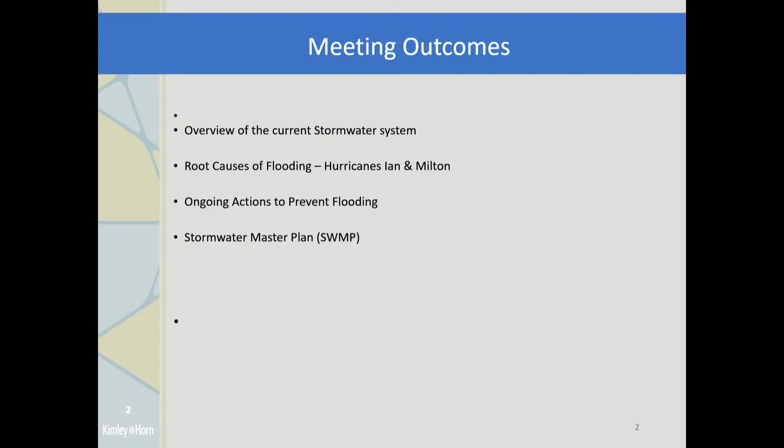So these are just our meeting outcomes, and City Manager Wayne has already been through these, so I'll just skip to the next slide. So, as the Manager indicated, we're going to start off tonight with a general overview of our stormwater system, starting with the larger, going to the smaller, and where eventually that water goes. Won't spend a lot of time on it.

But Juno, I just want, I'm sorry. Sure. For one quick pause for council. If you say something and immediately in one of our minds we want clarity, are you okay with us pausing you and having you retouch on something? Yeah, I think I would prefer it that way, so that it's fresh in everybody's mind. If I use a term or say something that you guys don't understand, please by all means stop me, and I'm happy to provide additional explanation. Okay, so we'll do that, and when you get to the projects portion, after each project, give me a second to see if anybody has specific questions to that project. Absolutely. Happy to.

So next, we're going to talk about some of the major drainage features in the city stormwater system, starting off with our stormwater ponds. As you can see, we have almost 600 ponds here in the city of Port Orange. Of that 600, the city maintains 136, so less than 25% of the ponds in the city it's actually responsible for maintaining. The majority, over 75% of the ponds, are maintained by private entities. Most of those are homeowners associations or a property owners association for a big commercial project. So we rely a lot on those associations to properly maintain their systems. DOT also has a handful of ponds, and so does the county.

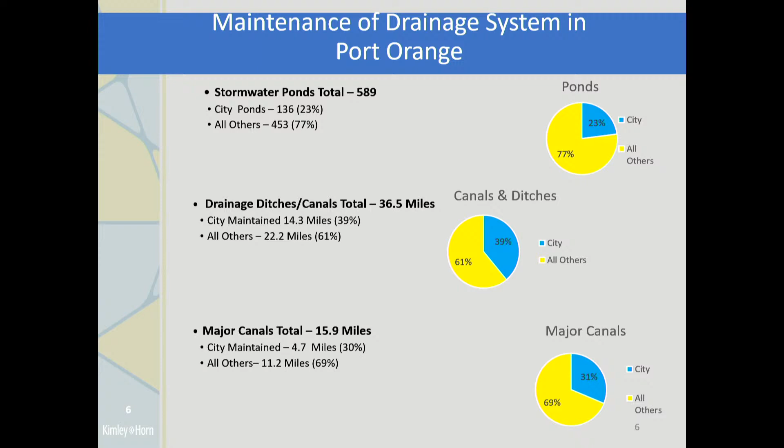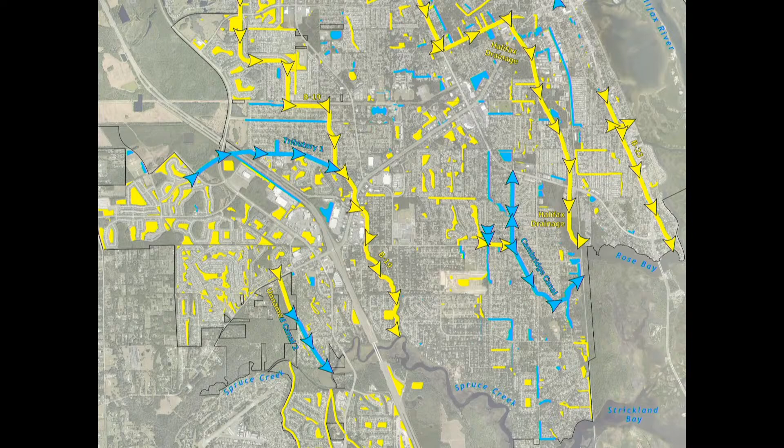And then we'll take a look at this map and see if I can get this to work here. Zoomed in nice. So as you can see on the map, everything in yellow is maintained by an entity other than the city, and everything in blue is maintained by the city. The larger bold lines with the arrows are our major drainage canals, the smaller ones are the ditches, and then the ponds are the other entities you see. So if you look at the canals and ditches overall, again, we maintain about 40% of those here in the city.

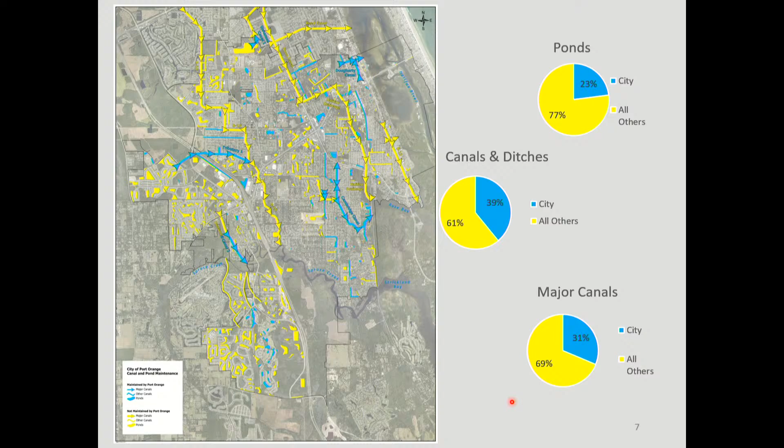Okay, so where does all the water go? So the water gets from the ponds into the ditches, into the canals, into these major canals. And then when the water flows out of the city, we call that an outfall. So that's basically where water is going from a ditch or a canal out into a receiving water. So here in the city, we have 3 receiving waters. We have the Halifax River, we have Rose Bay, and we have Spruce Creek, which then flows into Strickland Bay. So 3 receiving waters for all of our outfalls.

We have 2 types of outfalls in the city. We have gravity outfalls, where that's just what it is. It just takes the slope of the land and flows out via gravity. We also have pumped outfalls. So on the map, the gravity outfalls are indicated by a blue arrow. The pump station outfalls are indicated by a purple arrow. I'll zoom in a little bit on the map so we can see.

Even though there are approximately the same number of purple arrows or pumped outfalls as there are gravity outfalls, as the manager indicated, the vast majority of our water discharges via gravity systems. So we have one major pumping system, and that's our Cambridge system. The rest of our pumping systems are relatively small when compared to the major gravity outfalls we have.

Are all of the major outfalls one-way flow? No. Can you explain that? So these gravity outfalls discharge into tidally influenced waters. So the Halifax River, Rose Bay, Strickland Bay, up Spruce Creek, it is influenced by the tide. So if you have a high tide condition like a king tide or a tidal surge associated with a storm, it can actually physically push that water back up into those canals and basically, like you said, reverse the flow. So they are not strictly one-way systems.

Just one more thing on this map, and I don't have my pointer, so I'm going to have to exit out of the Zoom here. But if you look at these two right here, you'll notice that we have a blue arrow facing a purple arrow. That's going to come into play later on in the presentation, where our biggest gravity outfall in the Nova Canal system meets at the same place as our largest pump station outfall in the Cambridge Canal pump station. They meet at the same place. So when we start going over the projects later, we try to address that situation.

Juno, can I ask you a question? Please. So back to king high tides, storm surge, water's coming over Halifax, it's pushing all the way to US 1. Right? We've been very fortunate we haven't had a direct hit from the Atlantic. Most of our storms come from the southwest. We have high tides due to high winds. We have king high tides due to lunar. When it rains 22 inches, on the other side of US 1, what do we do with that water? I mean, we got a storm surge, and we got 22 inches of rain.

So that's an excellent question, and not to get you too far in advance, but that's when you have to turn to what we call mechanical means, aka pumping. We have to pump that water, so you can overcome those tides if you pump water. Currently, we don't have those mechanisms. We have a couple of smaller pump stations along that corridor, but as you'll see as I go through some of the projects, that's a lot of times the solution we landed on. Thank you.

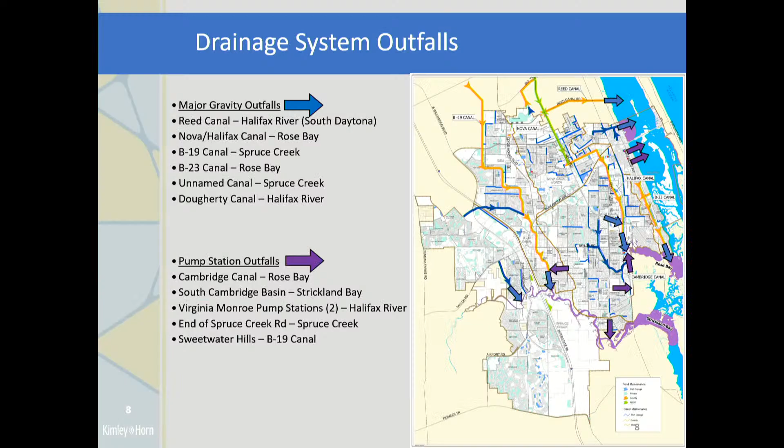That's good. Yep, that was that one. So that was just kind of the brief history of big picture basins into canals, ponds, canals, and ditches, into outfalls, and how all the system ties together. Next, we're going to look at some of the causes of flooding in Port Orange, and we're going to really focus on Hurricane Ian and Hurricane Milton, because those are our two most severe flooding storms that we've had.

And why is 1990 important? Well, going through the mid 80s into the late 80s, the federal government and the state government were developing stormwater regulations and how to manage stormwater. And then in November of 1990, the city formally adopted our specific stormwater design criteria that we're still using. A lot of that criteria today, obviously, we've developed and advanced. But starting in November of 1990, we had those specific design criteria for stormwater regulations. So over half of the homes in the city were constructed prior to stormwater regulations. That's an important thing to note.

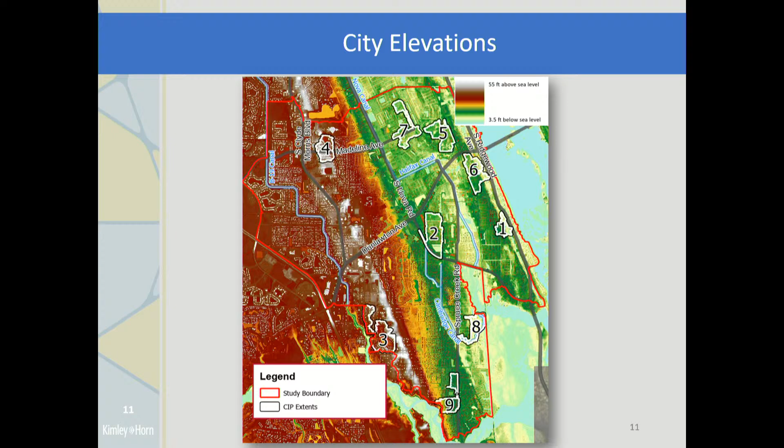Okay, so now we're going to start talking about FEMA special flood hazard areas. A little bit of history. The FEMA flood maps, or as we know them, flood insurance rate maps, were developed in the 60s, prompted by the National Flood Insurance Program, and they were meant to encourage homeownership and to protect properties against flooding. So these are federal maps, developed by the federal government in association with the National Flood Insurance Program.

So you can develop in these special flood hazard areas with base flood elevations today, but your finished floor elevation has to be a minimum of 1 foot above that base flood elevation. So if your base flood elevation is at 5, the minimum your floor can be is at elevation 6. And that's been determined by FEMA's mandate, and I believe that's city code, right, Tim? That's the city code. Okay.

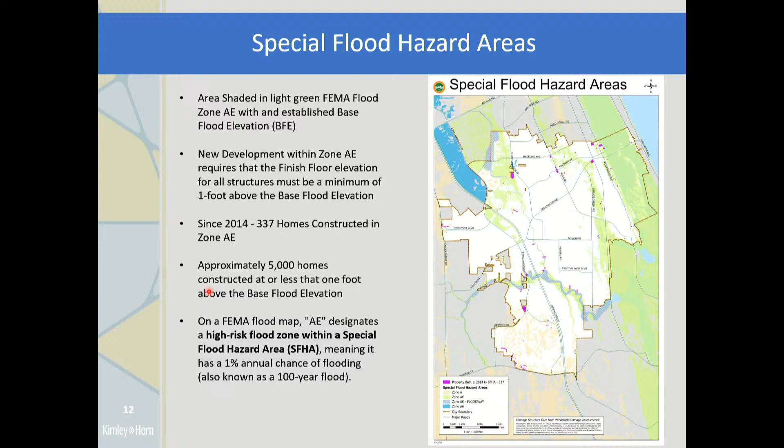But the thing they both had in common is when the eye exited the state, it was just south of Port Orange. That puts us in the northeast quadrant, the dirty side of the storm, known for higher rain totals and more severe weather. So we caught a lot of bad luck from how those storms tracked across the state. They went really, really slow and dumped a lot of rain on us.

This really just kind of follows up with the previous slide. After Hurricane Ian and Hurricane Milton, myself and public works staff and management staff have visited dozens and dozens of residents. We've talked to dozens of residents on the phone, at their houses, and for some of the longer term residents, the residents that have lived here for a long time, we started to hear a common theme. I've lived here 20 years. I've lived here 30 years. I've lived here 40 years. I've never flooded. How is that possible? So, well, let's try to figure that out.

Okay, so that's kind of the first part where we've looked at the stormwater systems, how they function, where they go, and looked at some of the root causes of the flooding from Hurricane Ian and Hurricane Milton. Now we're going to start talking about some of the ongoing actions, some of the planning actions that we've been taking, and some of the maintenance and repair actions that we do as a city.

So the first thing is the Stormwater Master Plan. That's what we're here talking about tonight. As the manager indicated, we're about 95% complete with the master plan. I have a draft of the plan that I'm currently reviewing. And so really what we're doing right now is we've developed a matrix to try to prioritize these projects. So we're really finalizing that prioritization matrix to prioritize the projects.

And probably the most important thing is trying to figure out how we're going to pay for all these projects, because none of these projects are cheap, unfortunately. Or not cheap, but cost effective. Cost effective. Thank you, Councilman Green, I appreciate that.

And so at the same time, as we're doing the master plan, we're doing what we call a vulnerability assessment. A couple of years ago, the state came up with this Resilient Florida program, a program that makes you eligible for grant money to build projects. Before you can be eligible to apply for grant money to build projects, you have to perform a vulnerability assessment on your city. We received a grant from FDEP to perform this assessment. We're about 70% done with that assessment.

So once we complete the vulnerability assessment, we package that up and we send that to FDEP. They review it, and once they accept the vulnerability assessment, then we're eligible to apply for what they call implementation grants or construction money, up to 50% of the construction cost. So if we're looking at a $20 million project, we're potentially eligible for $10 million through Resilient Florida by doing this vulnerability assessment and having it accepted by the state.

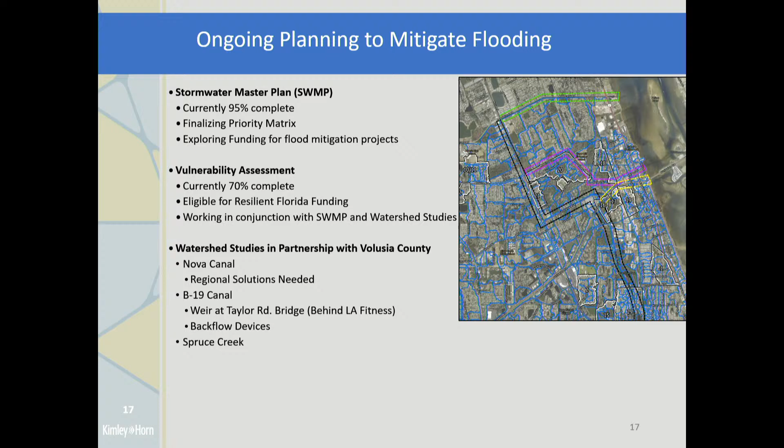Seeing a theme. Yeah. We are. Okay, now I know why they have port in the name.

All right. So, this is not my area of expertise by any stretch of the imagination. This is something that primarily our community development department is working on, but it's just another thing that the city's working on. There's multiple programs out there to help individual homeowners. FEMA being the first one. With FEMA, the unique thing is the FEMA grants, first of all, take a long time to process.

We're still waiting for responses back from Hurricane Ian through the FEMA process. And the city has to be the applicant on those grants. So the state did a really good thing early in 2024. They developed a program called, if I get it correctly, Elevate Florida, and the Florida Division of Emergency Management runs that program. The idea is it's going to be a very similar program to what FEMA's doing, but they want to take those timeframes and cut them in half or even more. They want these grant processes to move very quickly.

And with these grants, the individual homeowners apply. Correct, Tim? Okay, thank you. The other thing available for individual homeowners is going back to the Transform 386 through the county. There is some individual assistance available through the county, and I think they actually held a couple of workshops today for individual assistance. So aside from the big regional stormwater projects that we're going to construct that will help a lot of people, there's a lot of one-offs where maybe it doesn't make sense to do a $5 million project for 3 homes. That's where these other programs become really important, because there's still something available for those homeowners.

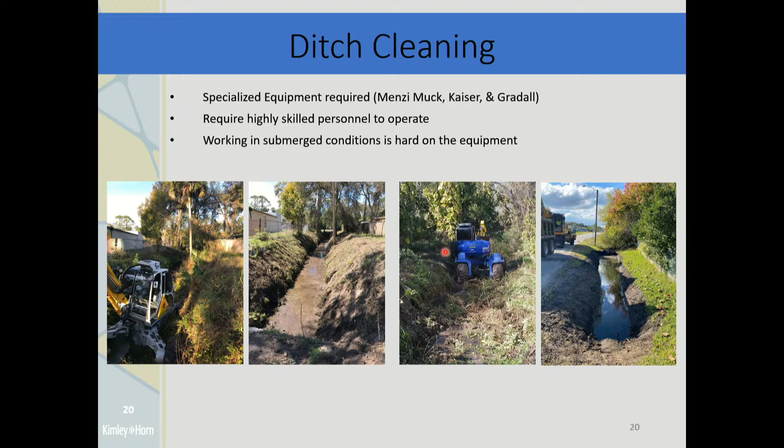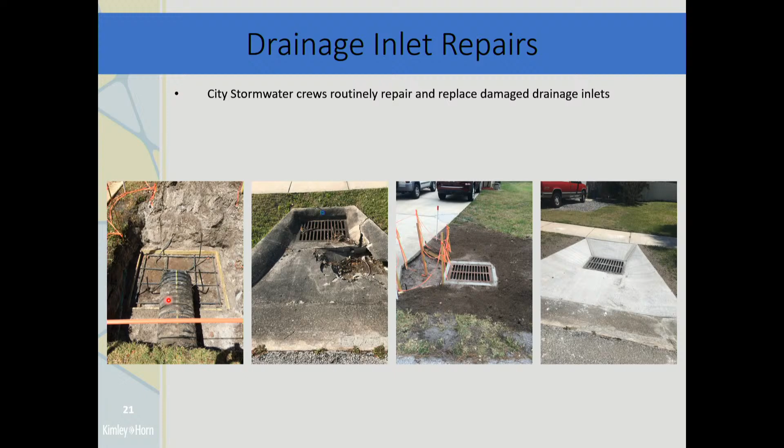Just real quick, so we have over 5,000 drainage inlets in the city. So this is a constant thing we're doing. We're repairing. This is what we call the apron to the inlet. So these things are getting broken all the time. So we're always out there repairing these, and sometimes we're even going out and replacing inlets altogether if they've been damaged or broken. So this is an ongoing activity for us.

Corrugated metal pipe. So going back to the 70s and 80s when we were developing half of the city, it was common practice in those days to use what they call corrugated metal pipe, or CMP, for the roadway drainage infrastructure, for the pipes underneath the roads that capture the roadway drainage and route it to a pond or to a canal. And due to our high groundwater, in the older parts of the city maybe a foot or two below the surface sometimes, these metal pipes sitting in that water for decades corrode and they rot away.

And you see a really good example of that right there. You see that piece of pipe, that was underneath the road. And so when those pipes fail, not only do you have to fix the pipe, you've got to dig up the road, you've got to fix the road, and those are very expensive fixes. So what we're trying to do to be proactive is another method. It's a trenchless method, and it's called cured in place pipe lining.

So you basically have a liner that's impregnated with an epoxy type resin, and they run that liner all the way through the piece of pipe that needs to be rehabbed, and you seal off one end and inject either hot steam or hot water into that liner, and it blows that liner up to match the diameter of the pipe, and then the heat sets that resin off. And as that resin cures, you end up with a brand new piece of pipe inside your old piece of pipe. You're not digging up roads most of the time, you're not having to do major repairs.

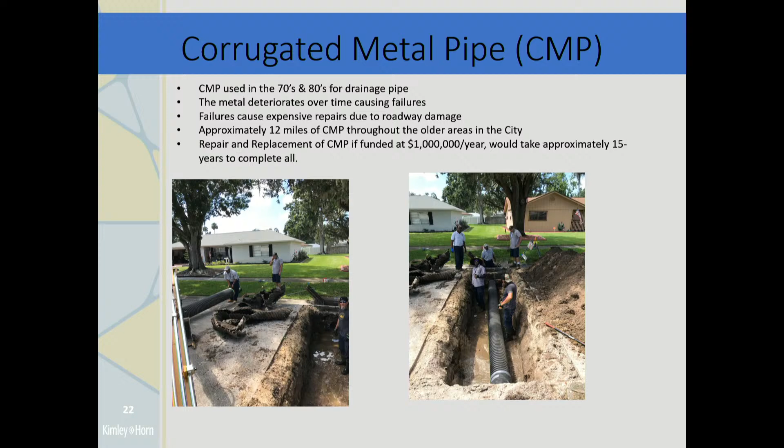So we're being very proactive with trying to get out into the older areas and find these pipes before they fail and line them. And just as a point of reference, we have about 12 miles of CMP remaining in the city. And if we fund it at $1 million a year, it's still going to take us almost 15 years to get all that pipe either replaced or lined. So we will be doing this for quite some time. Okay.

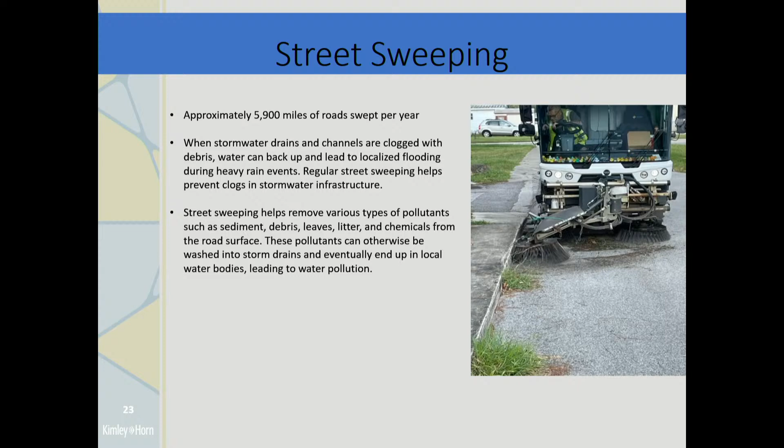The next thing is street sweeping. I like to call this our first line of defense for our drainage system. So we're sweeping the roads, basically trying to get as much debris, leaves, branches, oils, and grime off the road before they get down into our drainage system.

So what you do is you get that hose, which is a jet hose, and there's a jet nozzle that goes on the front of that hose, and it's got backwards facing jets, kind of like a jet engine, facing backward to push you forward. So you put that jet nozzle in your piece of pipe, you turn the jet on a little bit, and it pulls itself through the pipe.

And those hose reels are usually 300 to 500 feet long, so you get a couple of 100 feet out of there, and then you really crank the pressure up. You get it up to 3,000, 4,000, 5,000 psi in some of these jet hoses. And you turn your vacuum cleaner on, and then the hose reel slowly reels itself back in, meanwhile pushing all that dirt, grime, and debris back to that vacuum, and we're sucking it up into that vacuum truck.

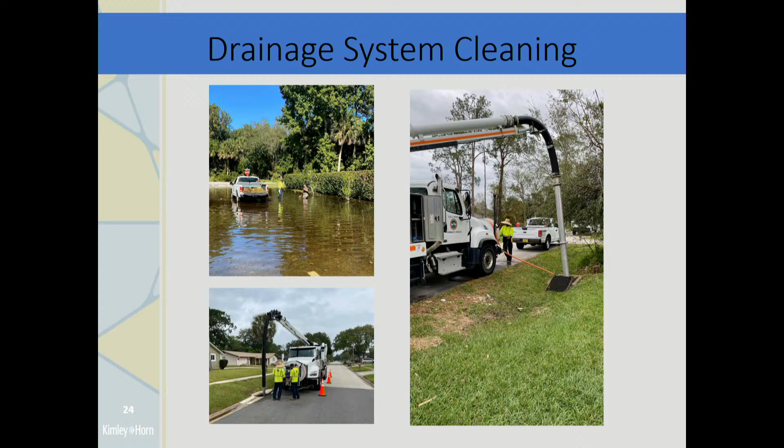The next one is just simply clearing curb lines and manually clearing a lot of work. And I'm just going to take a quick second here in the presentation to recognize our public works staff that are out there doing this work. These are true first responders, in my opinion. During the hurricane, I worked the EOC.

A lot of times we'll get a call from police and fire saying we got a call on this road, but there's a tree down. So what do we do? We call public works. Hey Tom, can you get your staff out there? Fire needs to get to this house, or police need to respond to this emergency. So they're clearing trees. There's a tree falling on a house. We can't get into the house to try to rescue this person. So these guys are there cutting the limbs, they're cutting the tree down.

So I just wanted to take a quick minute to point out that these guys were out here working during the storm, in peril, and then once the storm has passed and the floodwaters recede, they're still not done. A lot of our other first responders, our police officers and our firefighters, go back to somewhat normal operations. That's when these guys are driving trucks, pulling debris off and collecting the debris from the roads.

So after Hurricane Milton, they worked through the storm, and then immediately following the storm, they're working 12-hour days, 7 days a week, collecting debris for almost 3 months. So just a quick shout out to those guys. If you see them out there, just tell them thank you and that you appreciate them. This happens to be Andrew right here. He's a really good guy.

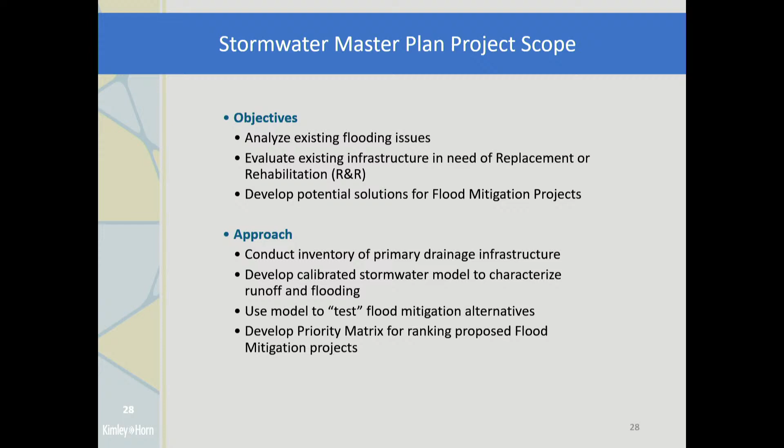And so the master plan is a document that's got a lot of information, but the heartbeat, the heart and soul of that master plan is what we call a stormwater model. And a stormwater model is basically a computer simulation. And so you use this model to try to predict something that's going to happen. I'll kind of make a quick analogy to weather. You know, you have your Doppler radars, right? And then when they show you future Doppler radar, that's a computer simulation that's predicting what the precipitation is going to be based on a bunch of input parameters.

So when we started building this model, to me there's two really, really important things when you're building a model. Your data collection and your data input are probably the most important thing you're going to do. So if you don't have good data to put into your model, it's not going to give you good output back out.

Another really, really important thing is what we call our boundary conditions, or our tailwater conditions. When we do these models, you have to have an area, and you allow water into your model, and you allow water out of your model. And where the water leaves your model, we call that a tailwater. And so when we're running these model simulations, we were very, very conservative with our tailwaters.

Meaning, we're modeling with tidal surge. We're modeling with king tides. We're not modeling at low tides when everything works beautifully. We're modeling at king tides or at tidal surge to make sure that the solutions we come up with are going to work during those conditions, because that's when we need them to work the most.

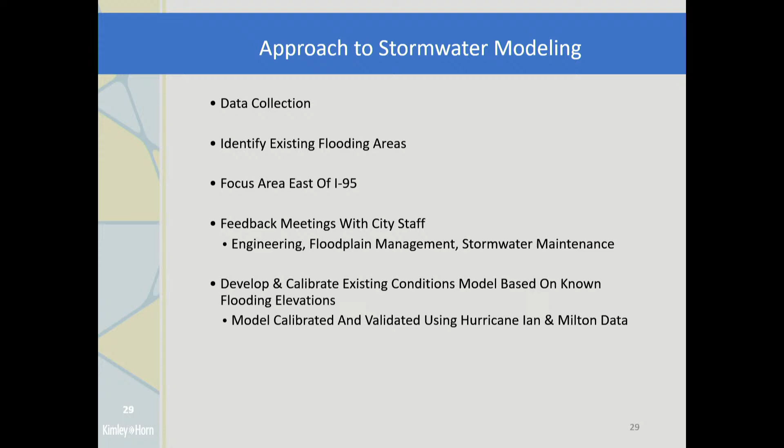So our model is predicting accurately what actually happens in the city when we put a certain amount of rainfall into that model. So that's a really, really big milestone. Once you get to that point, then you can really start to use your model as a tool. Because up until that point, you're building it, it's not a tool for you yet. It's not a tool for you until you've calibrated it.

So what you're saying is Milton, unfortunately, that came through was a calibration to what they had already put together as a model to back up what they're saying. That's an excellent point. So I think it was a day or two after Milton, I get a call from Victor, hey man, we're on the ground, we're just in town looking around. So they're here with their rubber boots on. They're looking to make sure that what their model's doing is accurately predicting what happens.

So we had a real world calibration event, basically, that you don't often get when you're developing these models. We had something that happened as we're calibrating it that we can calibrate the model to. So that really helped us have a lot of confidence in the model. It's incredibly unfortunate that it happened because we had so many homes that flooded. Yeah. But we did use that to try to make our tool even better. Okay.

And so once you've got your calibrated model, that's where you start going, okay, we know we've identified these areas. We call them areas of interest, the areas that we see in the model and that we know on the ground that actually flood. And then you start building scenarios that are going to try to fix the flooding. So you can say, okay, let's put in a stormwater pond here. Let's make the pipes bigger to the outfall. Let's do any number of things and then run a simulation and see how the model responds.

And for a lot of what we found is our gravity solutions or our simple solutions, the model didn't have what we call any sensitivity to it. So you didn't really get any benefit. So you'd run the model before you did any improvement. You'd put the improvement into the model. We didn't see much improvement.

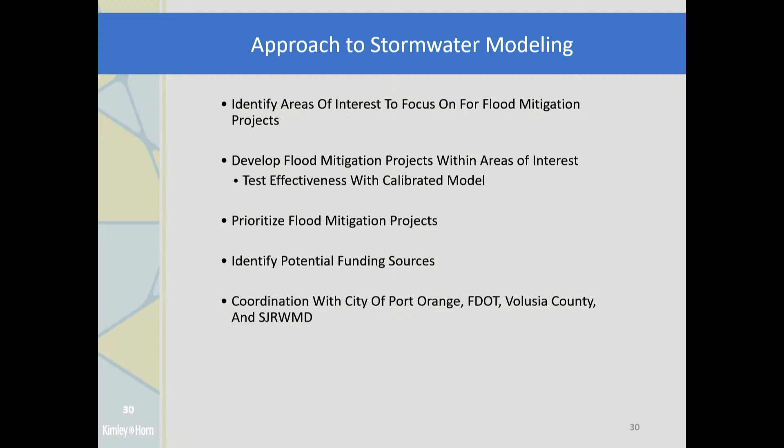And so, okay, so this slide, I want to highlight something here. See if I can figure out how to do it, because this is important. It did show up. Perfect.

Data-driven solutions. That's really important. So the solutions that we come up with are data-driven. We don't think these solutions are going to work. We have data that shows that these solutions are going to work. So kind of my catchphrase that I've come up with over the past couple of days is data-driven decisions lead to effective solutions, right? So you use good data to drive your decision, your solutions are going to work.

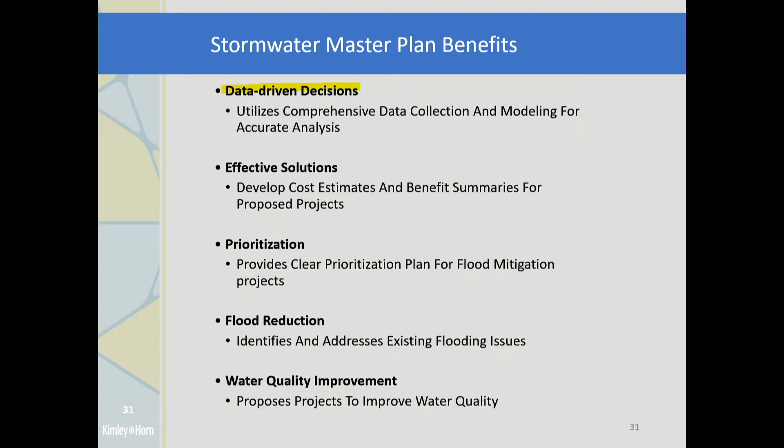The thing about these projects that we're going to talk about, these projects are not designed. They're not on the ground yet. So we're still sitting at about 10,000 feet in the air with a lot of these projects, still kind of looking at a zoomed out picture. And then once we take these projects to design, that's when we get on the ground. We do physical surveys. We know exact pipe sizes. We have a lot more real information and a lot better information. But I'm going to give you, like I said, about a 10,000 foot view of these projects. And I'm happy to answer questions on any of them.

Can I just stop you 1 second? As much as this is for us, it's for everyone in the crowd. Do y'all need a little break before we get into this? Because this is what we're here for. Thank you. Just wanted to make sure. Sensitive to you. I'm good to go. It's yours. I tried.

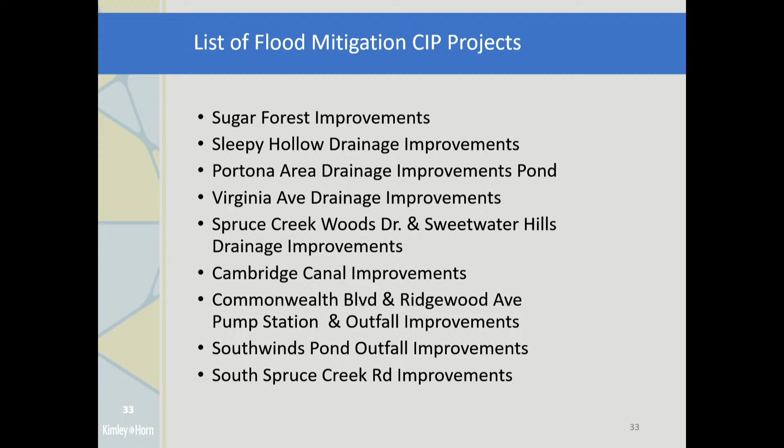And I just want to reiterate what the mayor and the manager both said, that in the coming months, even though we're going to talk about these briefly, we're going to be able to get into a lot more detail with those individual meetings, because we'll have a lot more time to talk individual projects, individual streets. So the first one, and try not to get caught up in the names. We're engineers, we're not project namers, so we just named them what we thought makes the most sense, right? So the first one we're calling our Sugar Forest drainage improvements.

So this is really a multi-phase project, and for phase one of the project, you guys have already approved the design contract, and we are going to be starting survey and kickoff meetings here in the next week or two. So this project is starting right now for design. And we estimate our design and permitting timeframe to be a little over a year, about 14 months. We're going to try to fast track these as much as we can, but some things we don't have control over. We estimate our construction time to be about 18 months, and for both phases we see a lot of potential benefit. We're talking about potentially helping 400 homes with this project, both phases.

Okay, so what does this project look like? So real quick, I'm gonna zoom in on this just so that we can kind of see. So there's some colors on here. You'll see the light blues and the dark blues. The light blues are areas that flooded before the improvement. Dark blues are areas that the model shows with the improvement.

So again, these are very conservative estimates, and we don't have finished floor elevations for all the residences. So just because a house is shaded in light blue doesn't mean that house floods. The model is not that sensitive to the finished floor elevations. The model is only as sensitive as the data we put into it, and we just put in ground LiDAR data. So the ground around a residence may flood. So I don't want people to think just because there's a light blue shade around their house, that means they're still going to flood, because that's not necessarily the case.

And then I'm going to go to the next slide because it's a little bit easier to see because there's not all the stuff on it. So while you're doing that real quick, in this map, we have inputted the topography of all of the land? Yes, so we were able to get the LiDAR data, and we use that LiDAR data as our topographic part. So there is topo in the model. That's correct. Nice, thank you. It's not survey topo, but the LiDAR data is actually incredibly accurate. They've developed this technology. It's not radar anymore. They're using light to determine the topo, and it's actually pretty accurate.

Nice, okay. Can I ask a quick question? Of course. Juno, on the first page, it says the number of properties helped is 400. Right. But then on the slide, it says buildings removed from floodplain, 183. Can you just touch on why those numbers are different? Obviously 400 homes means 400 homes stand to benefit in some way, shape, or form. But can you explain when it says 183 removed from the floodplain? So that's a phase 1 number, and the overall is the 400. Okay. So we're looking at this as a phased project, potentially a 2-phase project.

So the city about a year and a half ago purchased the 2.5 acre piece of property at the corner of Madeline Avenue and Pepper Hill, with the thought that we're going to put in a stormwater pond to help the stormwater in that area. So as we ran our model simulations, the first simulation we ran was just a pond. It didn't work. Just that pond did not solve the flooding in that area. I don't think that was a big surprise to us, but the model proved to us that it didn't work. So we're not going to just dig a pond just to dig a pond. We want to make sure that these solutions are effective.

You know the cost breakdowns for phase 1 versus phase 2? I know we got a total, but. So we're estimating phase 2 to be between $8 and $10 million. Okay. What's the estimate for one then? Yeah, phase 1, 8 to 10. Same. Oh, okay.

And again, these are not construction cost estimates. These are what we call order of magnitude estimates. We don't have any design, so we don't know the exact size of the pumps. We don't know the exact size of the force mains. We don't know the exact size of the wet wells, and all that comes into play when you're costing these things out. And also the force main is going to be the X factor in this one, the pipe that we're pumping through.

If the force main gets to a certain size, a certain diameter, we're going to have to open cut and trench the whole way, which is going to cost a lot more money because then you have to go restore all the roadway. If we get it down to a size that we can directional drill, which is trenchless, then you can start having some significant cost savings. But we're not quite there yet.

We're going to be there in a couple of months though, because we're going to start designing, and these people over here are going to help us determine that. We're going to put in a force main that's appropriately sized to handle the flow that we need it to. We just don't know exactly what that size is yet. So that's one of the X factors, one of the unknowns in this project.

One of the things, when you were talking about what we were designing it to: the west side of town, when we were showing the 1990 post, everything in Water's Edge and Woodhaven and all that area on the west side was built to that 11 inches of rain. In both storms, we had very minimal flooding out there. The issue is they're built with a ton of ponds.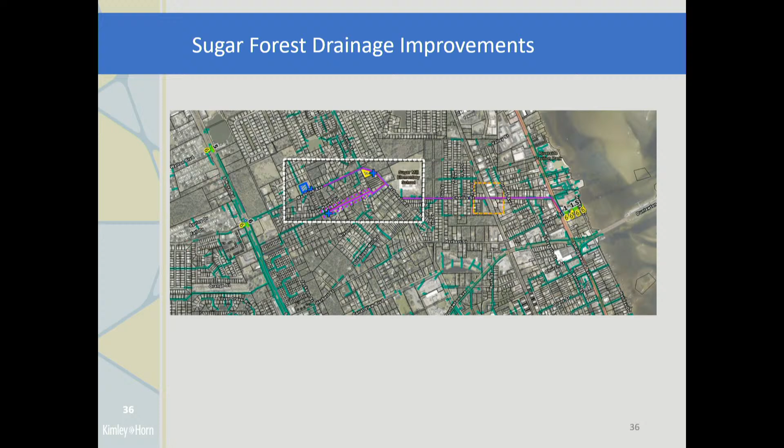Go ahead. Okay, so next we're going to talk about the Sleepy Hollow Drainage Improvements Project. This one, again, we're estimating a year and a half time frame to design and permit, and about a year and a half to construct. We're looking at 90 homes estimated, and this is again a conservative estimate for 90 homes, and then you see the cost there.

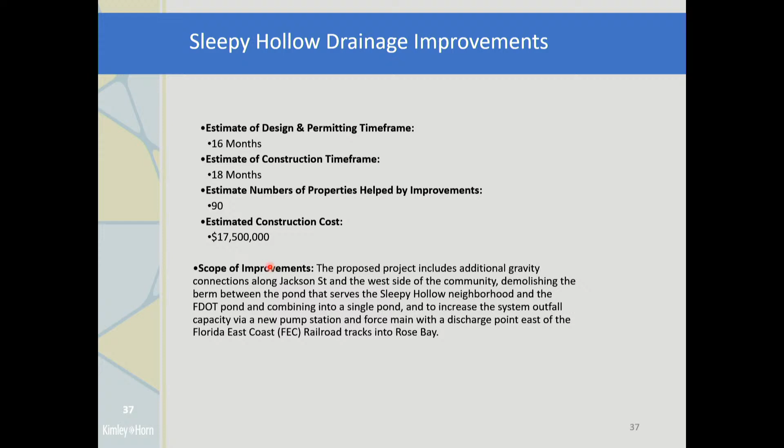So for a point of reference, I'll zoom in again on this one. So if you can kind of follow the laser pointer, I know it's kind of zoomed out, that's Jackson Street right there. Dunlawton is kind of in this top corner here, and you have Nova Road that comes through here, and then this is Sleepy Hollow right here, and then this is our Publix Plaza right here. That's where I grew up, right there.

So for this project, when I say gravity system improvements, that's putting pipe in the ground, and the idea of putting the pipe in the ground is to route that water somewhere. So we're looking at doing gravity systems along Jackson Street, and then down the west side of Sleepy Hollow, which would be the east side of the Publix Plaza, and then depending on whether we can get easements or not, we may continue down that east side or west side of Sleepy Hollow, or we may bring those gravity system improvements out onto Nova Road.

And then we're also going to put some gravity system improvements within Sleepy Hollow to try to capture that water and bring it to our ponds. So currently, Sleepy Hollow has a small kind of linear pond directly south of the development. Are you able to zoom in on that at all? I kind of am zoomed in as much as it'll let me, really. Okay. And I do apologize. These are modeling level maps, so they're not really construction ready. So you do kind of have a zoomed out view.

So there's the Sleepy Hollow pond, and then directly on the other side of that pond, there's an FDOT pond that the city actually owns, and that pond takes the drainage from North Nova Road up to Dunlawton Avenue. So this project is going to take those ponds and combine them into one larger pond. We'll get a little bit of additional volume because you have about a 20-foot wide berm. So you take all that dirt out of there, you get a little bit more volume in your pond.

And then once again, we're going to construct a stormwater pumping station on the southeast corner around the Miles Drive area, and we're going to pump. If you follow that purple line, this is where we're initially looking at pumping that water to. The city owns a small parcel of land down there. We haven't completely identified where our outfall for this project is going to be, but it's going to be east of the railroad tracks into Rose Bay.

That would also be enclosed pumping? Yes. So every time I'm talking about a stormwater pumping station, that's with a force main, and we call that a closed system. So that pipe is closed off until it discharges to its ultimate outfall. And that'd be one way at its outfall. One way at its outfall. Right.

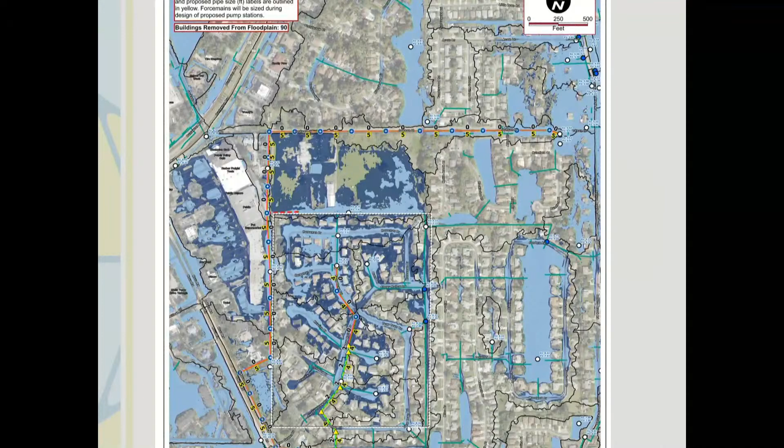And again, this one is 90 homes, but if you look at the dark blue, with the exception of the roads, most of Sleepy Hollow, we're not flooding homes. We're doing what you call nuisance flooding or roadway flooding. And we can accept that. And this is at the peak of the flood.

Were there any... I'm sorry, keep going. That's the project. Okay. In that particular area, were there any other opportunities identified where we could hold more water, even if it's temporary? I know there's a really large retention area there to the south of the project area, but any other areas that could be expanded, or didn't something happen there with those two ponds? Now they're one pond, and that's actually going to be helpful, we think?

So prior to Hurricane Milton, we were trying to pre-stage the pond in Sleepy Hollow, because these two systems, believe it or not, and I'm gonna have to zoom out to get the pointer back on it, but the Sleepy Hollow system discharges actually from this little pond down here. It goes north and then discharges through a ditch system out to the Nova Canal. And then the DOT system actually has a gravity outfall down Nova Road. So they're two separate outfalls.

So what we were doing prior to Milton, we were pumping that Sleepy Hollow pond to try to get as much storage volume available for that pond prior to the storm. What happened is we pumped that pond really, really good. We pumped the Sleepy Hollow pond so low that we had such a high difference. So the water level in the DOT pond is here, the water level in the Sleepy Hollow pond is here, and then we had a berm failure.

So the water started slowly migrating through that berm, and eventually, a term we like to use is water always wins, and that water ate through that berm, and so now the two ponds are in essence one pond. So for this project, we're just gonna finish that process. And this one will require DOT cooperation and approval for us to do this project.

So then no other opportunities in that area for any additional retention that could benefit, right? So we did look at, there is some vacant land that we looked at, but because of its low-lying nature, we didn't get a lot of storage out of that land. Okay. So currently Sleepy Hollow drains to the Nova Canal, which is already, as we know, the problem. Correct. And that's part of the issue: in low tides or when the canal's down, the system works really well. Oh, yeah, that's great.

So when we model this repair, I think we need to include what all is going into that ditch and into the surrounding area of Sleepy Hollow. Have we done that? Yes, that's included. I'll zoom in on Dunlawton Square. If you'll notice, a lot of their parking lot turns dark blue, and dark blue in these pictures is good. So a lot of that parking lot that was flooded initially turns dark blue.

So we're taking a lot of that water from that plaza, putting it into our system, and pumping it out. Currently it's trying to gravity into the Nova Canal, which is already dead. So bypassing the Nova Canal with this much water is a big deal. There was so much water in Milton that some of the Dunlawton Square tenants flooded. The parking lot was that high, and the water was that bad in the back of the canal.

Which is why I brought up whether they would be interested in storage themselves, and maybe we partner with them. But I know it's a very slippery slope to go down. That's a conversation that people at your level might have to have. Yeah, and I'd be willing to do it if you and I sat down first and talked to make sure it was feasible, absolutely. So maybe you and I will do that sometime. Good to go to the next one?

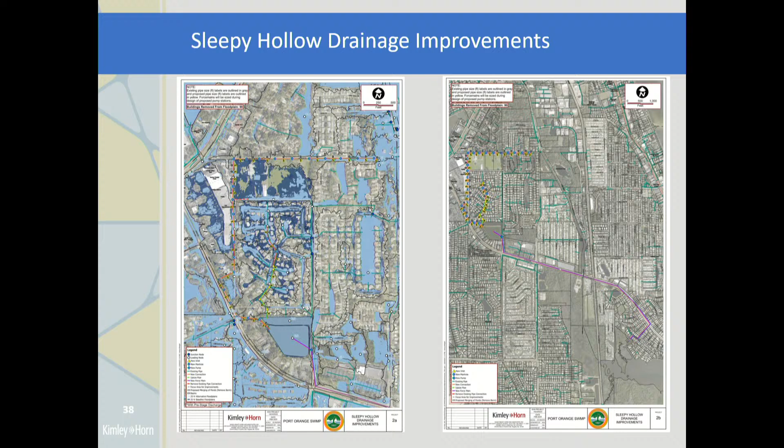Yes, carry on. Okay, so this next one we call our Portona area. For those that aren't familiar with Portona, that's our 2nd through 6th Street. Sugar Mill Elementary's in the area. Our new Madeline Commons development is adjacent to the Portona area.

So we'll take a look at this project again. We have our design, permitting, land acquisition, our construction time frame. Approximately 25 homes we're helping here. You'll see this is a much smaller number, because this is one of those ones where, because of the land we had available to us, we are able to make a gravity solution work in this area.

So the idea behind this project is you can see the areas that are hatched in yellow. We've identified those as potential stormwater pond areas. So the idea would be to collect the stormwater, route it to those ponds, let those ponds hold the water, and then slowly discharge that water east. One of the things of note on this one is once we get to the railroad tracks, we're going to discharge that, because that's where it currently goes.

That water currently discharges underneath the railroad tracks, goes east into the historic Doherty Canal, which goes under US 1, eventually outfalls at Riverwalk Park near the Chamber Building, where we have our water goat. That's where all this discharges. So with this one, on the east side of the railroad tracks, we're going to put a backflow prevention device, because that whole system's tidally affected, so we'll prevent the tide from coming back in here.

Is this also a smaller area and a smaller magnitude, like you wouldn't necessarily, even with this amount of land, be able to make the solutions work in some of the other areas because you're dealing with much higher amounts of water and larger areas? It's not the same scale as a Sleepy Hollow problem. Excellent point. There's a much smaller contributing basin to this area that we're having to account for. And this one we're not getting Nova Canal spillover or anything like that. So this is just really localized with this area.

And these houses were developed a lot longer ago, 1950s, 60s. This is one of the oldest areas in the city, right? Flat streets, just no elevation on the home. Right. Now, with the new subdivision that's been developed there, I drove through there, there's over 30 inlets in that neighborhood. And that's going into their retention that they developed, and then where?

So that development actually has 3 places that it ultimately discharges water. So they hold all of their water. They hold their 11 inches in their ponds, and then they have 3 outfalls. Part of the outfall goes west to Sauls Avenue. When you're developing a piece of property, you have to do a stormwater model. It's a much smaller scale than what Kimley-Horn did, but you have to do an existing condition stormwater model. You have to show, before you develop that piece of property, where does the water go?

So what the engineer who designed this showed was in the pre-development stage it went to 3 different locations. Some of it goes to Sauls, some of it actually discharges north into a ditch system that goes up into South Daytona, and then part of it goes east into this.

This ditch, part of it goes east into the ditch system, the drainage system that's currently in the Portona area. So it's 3 different areas where it discharges. And another thing, whenever you're developing land in a subdivision like this, you have to model what your pre-development discharge rate was. So how many gallons per minute does your land discharge before development? You're not allowed to discharge 1 single drop more of water in post-development than you are in pre-development. So you're holding all of that water, and you're only releasing in post-development what was released in pre-development.

And before, it would just hit that vacant lot and run wherever the heck gravity took it, right? Right, it went 3 different locations when it hit the vacant lot. That's correct. Yeah, there was no control. No lakes, no ponds, no retention. It had no retention. It could have flowed into the neighborhoods. It could have gone wherever, the path of least resistance. Correct. But you also have the capability of percolation. Yeah, but not 20 inches of rain. At 10, yeah. True, yeah.

Now we don't currently possess these properties though. That's correct, but they are for sale, or we've identified them as potential ponds. We haven't gone any farther with it than that. Anything else on this project?

Just a general comment on this particular project area. I think it's important for us to keep in mind that this is one of those areas where there are other projects outside of our jurisdictional boundaries that I believe would tremendously help this. I mean, if the Army Corps of Engineers and DOT can improve the Nova Canal system and the outfalls of all of that, because that's where a lot of this water comes from in this particular area. And then on top of that, this Madeline Pepper Hill project, I get it, why we want to be conservative.

Sure. But when you put it all together, it all makes sense that when you start connecting some of these opportunities, even though not all of them are within our control, I think the impacts could be significantly greater than we could anticipate. But it's good to look at things conservatively. Yes, and that's an excellent point, because if you go back to the Madeline Pepper Hill or Sugar Forest project, a lot of that water currently flows through this area to outfall. We're going to intercept that water and pump it, so it doesn't have to get through here anymore. So that's even less water that we're going to have to deal with, which gives us even more confidence that this project's going to work.

And lastly on the properties that we're talking about there, just keep in mind when municipal government is trying to acquire real estate, there has to be a strategy, and we've got to give our staff time to put us in the best position for that. And I know that they are working on that, and that'll be enough said on that for right now. Yes, thank you. On to the next one. Yes, sir. Go right ahead.

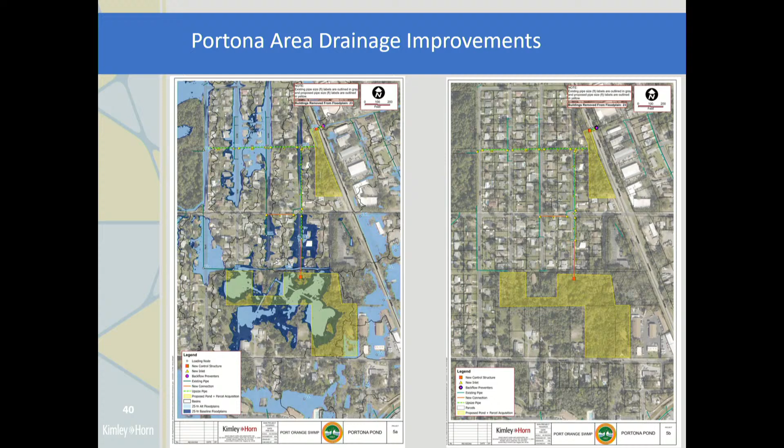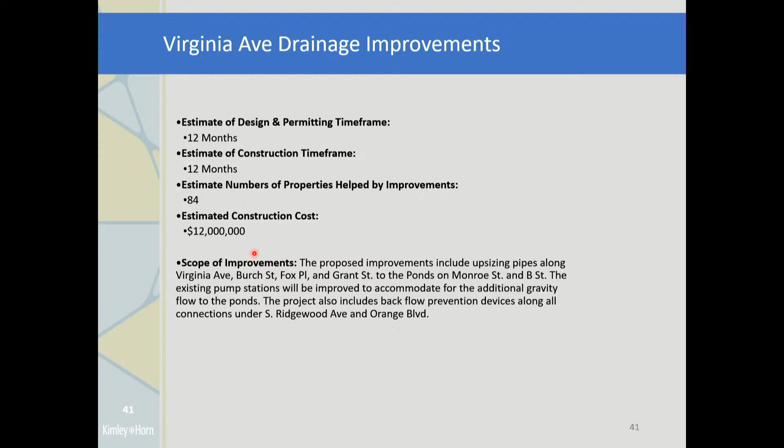Okay, so the next one we call our Virginia Avenue drainage improvements. We'll just go through the numbers real quick: again, permitting timeframes, construction timeframes, estimated properties helped, and estimated construction cost. So geographically, let me put my pointer. This is Dunlawton Avenue right here, going to the Dunlawton Bridge. This is Ridgewood Avenue right here. And then you have your railroad tracks right here. Virginia Avenue runs parallel to the railroad tracks and just to the east.

So this project is kind of a tag-on to a project that we constructed in 2019, 2020. We put a couple of small stormwater pump stations in and some ponds up closer to Ridgewood. The one shortfall of this project was the gravity system, the collection system, the pipes to get it to the pond, they're not big enough. So when a gravity pipe becomes over capacity, that's when you have the standing water.

So this project really is about getting more water to those ponds faster, and since we're sending more water to those ponds, we have to make sure that the existing pumps can handle that additional flow. So it may involve some upsizing of some pumps and potentially an additional force main or something like that. But once we get farther into the design is when we can get into all that.

But it's basically getting more water to our existing ponds and making sure our pumps can handle that additional water for this project. If I remember right, Juno, we talked about this. This is just north of Epiphany's Catholic Church, and you got White Place Park, yep. And that was part of our Parks and Recreation bond, was to redo that park and the possibility of making a storage site there too. Right. So that's outside of what is actually being shown here. This is part of it separately that can aid to this project.

So this is really retention, mostly in this area. This project is really a collection system to get more water to the ponds and then pumping that water to the river. Okay. It's basically just making that existing project a little bit better. Okay. Questions on this one? Good on that one. Nope. All right, we're getting there.

So this is another one that the name is long and wordy, but we're calling it Spruce Creek Woods Drive and Sweetwater Hills Drainage Improvements. For point of reference, let me get to the map here. Oops, I went the wrong way. Sorry about that. So this is Tumblebrook Drive here. This is Hensel Road here. This is what we call King's Landing, the new development there. So this is just to the west of there. This is part of the city that's actually not in a low-lying area. It's got some interesting topography. This is the area where we have some of our higher elevations.

And what we found when we were modeling this and when we talked to some of the residents over there is the area to the north along Spruce Creek Woods Drive is higher, to the point where the water actually flows down to Tumblebrook Drive and exacerbates the issue down there, makes it a little bit worse. Yeah, that area's shaped like a bowl. Yeah, it's absolutely a bowl down there.

So the idea behind this project is to intercept that water with a collection system before it has a chance to flow down to Tumblebrook Drive, and through pipes. This part is gravity. And then it's not shown on here, but I'm gonna turn my pointer back on real quick so you guys can see. This right here, where the laser pointer is, that's the southern end of the B19 canal right before it goes into Spruce Creek.

So this project again is a collection system on Spruce Creek Woods Drive, route that water west into the B19, and down in the Sweetwater Hills, we have a small pond at the bowl, and we have a diesel powered Thompson pump there that we've used for a long time to try to keep that area dry, and it works fairly well. It definitely has some limitations.

The force main is slightly undersized. It's only a 6-inch force main, so we can't push as much water as we need to. And then because it's a diesel powered pump and it's got some rudimentary floats on it, it's got some inherent issues, mechanical issues. Like for Hurricane Milton, we actually had that pump fail because water got into the fuel system and caused the engine to stop running.

So this project, we're gonna take that existing diesel pump station, construct a pump station with electric pumps, like we're looking at all, and then we'll back this up with generators. So we're going to basically improve the pump station, slightly oversize that force main, make that probably a 10 or 12-inch force main, so we can move as much water as we need.

And then we own an existing pond on the west side, kind of near where the yellow area is, and we've identified that area as a potential additional pond to hold some water prior to discharging to B19, because one of the unique things about this project is it does discharge directly to Spruce Creek, and Spruce Creek is an impaired water, so we have to do some water quality component to this project, which means we have to try to clean that water before we discharge.

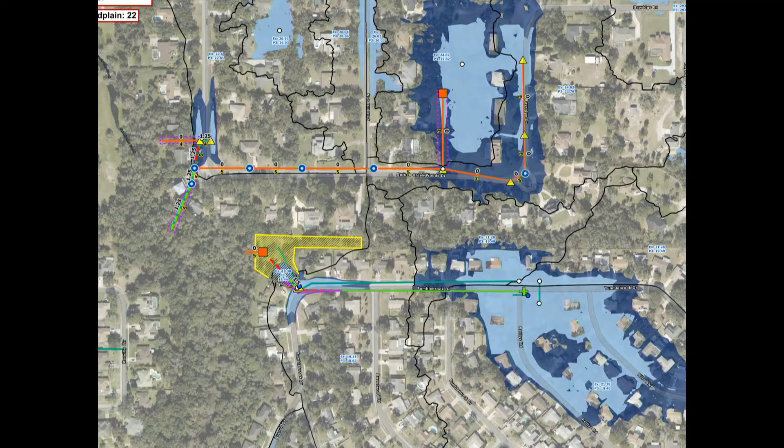Anything else on this? No, I'm sorry, go ahead. No? Oh, I just want to make sure.

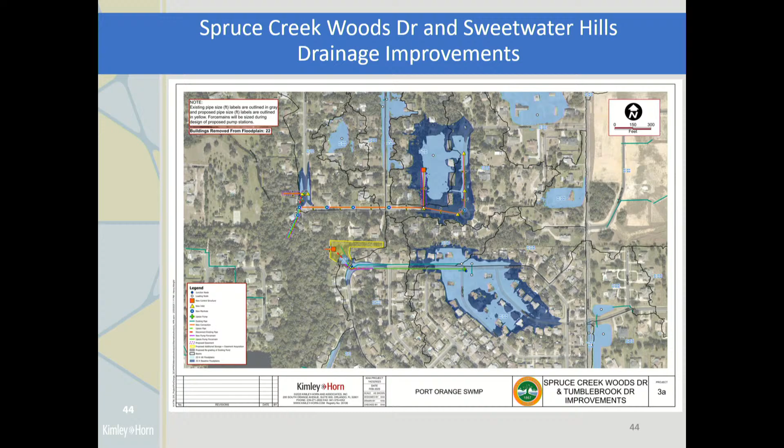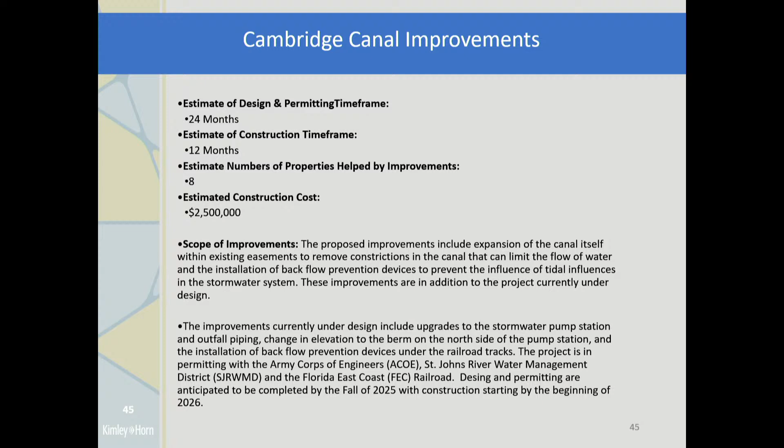Okay, so Cambridge Canal. So we did identify some improvements we could do to the Cambridge Canal Basin. But before I go through those, I want to give you an update on the project that we're currently under design for, because that's really the most important project we're working on down there. So I'm going to advance to the next slide. And this really just shows the improvements that we're looking at doing there.

So if you look at the area of the laser pointer, this is the area of our berm that failed during Hurricane Nicole. What happened during Hurricane Nicole is we have this area to the north, which is connected to Rose Bay underneath the railroad tracks. The water came up so high and with such force, it flowed back into our pond, up over our berm, and eroded it from the backside, and that's what caused the failure. So that was that tidal surge. So with this project, we're gonna increase the height of that berm approximately 3 feet.

If you don't mind, and if you don't have, well, I know you do. So this particular project area didn't exist prior to 2004. Correct.

So if you could just recap the history of this area, because I think it's important for us to know that this was a very large, probably the largest that I'm aware of in the city ever, stormwater mitigation project, and it has worked. It has made significant improvements to the area, but it needs to be better. And I think that's what we're doing. If you can just kind of touch base on that, I think that's important. That's correct. I wasn't here at the time, you know.

But post 2004, there was some flooding down in this area. So the city at that time actually constructed 3 different projects: Cambridge Canal North, Cambridge Canal Central, and Cambridge Canal South. This is part of the Cambridge Canal Central project that involved constructing these large stormwater ponds and constructing a pump station to take the water from the Cambridge Canal north of Taylor Road all the way through the canal system and pumping it out to Rose Bay.

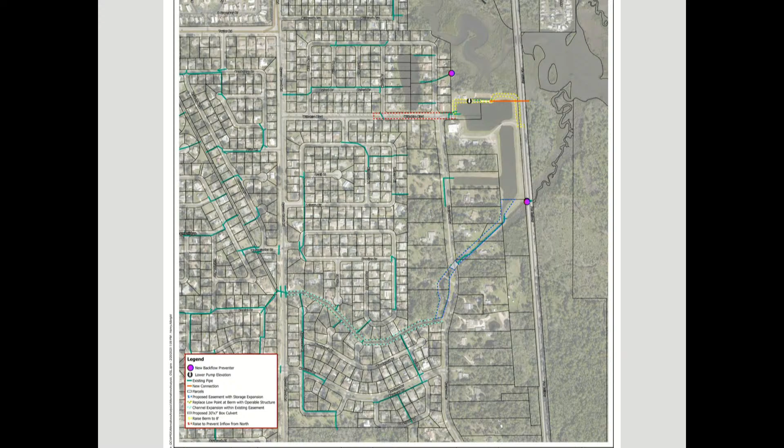Juno, the reality is we've got some beautiful engineering and problem solving developed by multiple individuals. You've laid it out. My question to you is, with Transform 386, Resilient Florida and things of that nature, sharing some of this engineering to the cities to the north of us so they can help build canal systems like what we're talking about. If we're sharing engineering so they don't have to go out and spend the money, Holly Hill, Daytona, South Daytona, whoever's above us that's sending us their water, it will ultimately help us in the long run, so we can mitigate the water before it gets to us.

That's correct, and that's where the county, through their basin studies, is performing basin studies not just for us. I talked to Ben Bartlett, who's the public works director there. He said he has like 12 or 13 of these basin studies throughout the county he's going to do. So we're going to go all the way up the East Coast and the Nova Canal. South Daytona is going to have some. The county's going to help them with that. So the sharing of the engineering is really coming through the county at this point through that Transform 386. But that's an excellent point.

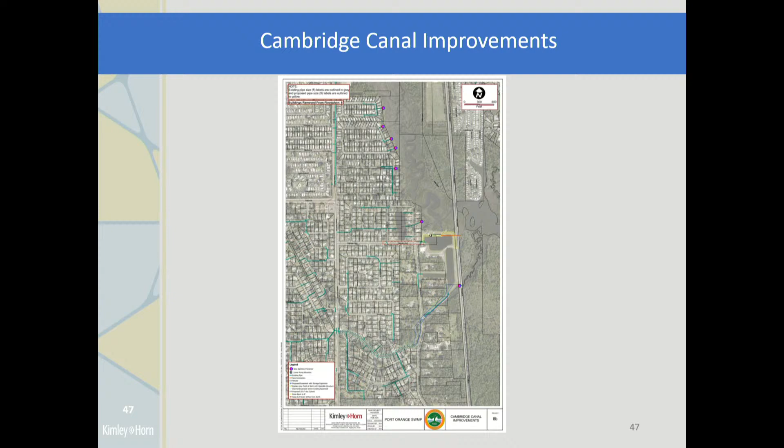All right. Go right ahead. Oh wait, I'm sorry. He's going to hang out after the meeting. You can ask him. Yeah, we can't do that in the formality of the meeting. So that's okay. After the meeting, we can talk about it. If you have something you want to clarify, go ahead.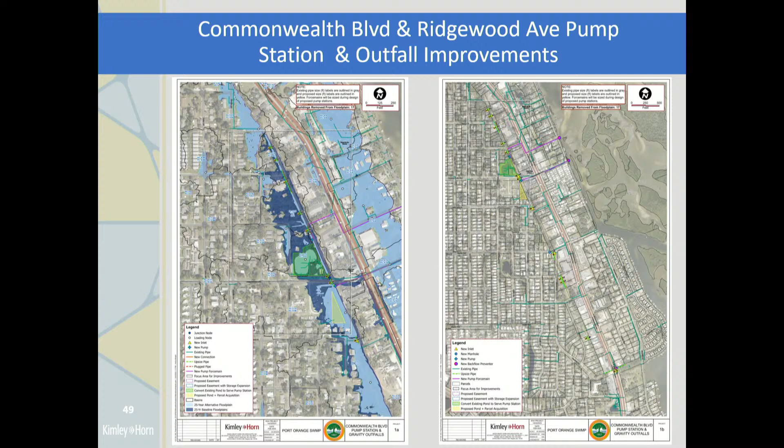All right, so the next one is what we're calling our Southwinds Pond outfall improvements. And so the unique thing about, and sorry, I jumped ahead. So this is our standard design time, construction time, a decent amount of improvement with this one, and yet another fairly high cost. This is one of the projects where we had a couple of areas of interest that we combined into one project. So the unique thing about our Southwinds Pond is it's in what we call a closed basin.

So that Southwinds Pond currently has nowhere to discharge to. So it fills up and it fills up and it just sits there. Right. It takes forever for it to go down. So the idea behind this one is, here's Madeline Avenue, let me get back to my pointer. I assume you guys know exactly where these are because I do. So back in this corner is kind of where the Walmart Neighborhood Market is. This is Madeline Avenue here, and this is the Southwinds development here.

So on the south side of Madeline Avenue is Viking Drive, and Viking Drive has some drainage issues. It was an area of interest, but it wasn't a big enough area to really rate its own project, so to speak. So we're going to collect that water on Viking Drive and route it to that Southwinds Pond. Might on the surface seem like a bad idea, but, and this is probably going to get a little more confusing than it needs to be, we have an existing what we call a reclaim augmentation station.

So back in the years when the city was experiencing drought and we were trying to expand our reclaim system, we would pump water from ponds into our sewer system and have that go to the wastewater plant to generate reclaimed water, because we needed more reclaimed water to water yards with. Those pump stations ultimately did not function as designed, because when you needed the water the most, the ponds were too low to pump out of. So most of the reclaimed augmentation stations have since been abandoned.

This is one of those areas where we had a reclaimed augmentation station, so we already have a little bit of infrastructure there. We have a wet well there, so we could potentially outfit that wet well with some stormwater pumps, and instead of pumping to the sewer system, we're going to pump it east. Atlantic High School's on the north side, so we're going to pump it parallel to its southern property boundary. And the big vacant piece of property outlined in orange, the City of Port Orange owns that. It's almost a 30-acre piece of property, so it's pretty sizable.

No. I was gonna say, June, I know me and you've talked about this quite a bit. As soon as I became a councilman, I got a phone call from a resident in that area, and as soon as you turn on to Southwinds, it's a lake. It is, and that water just doesn't go anywhere, so it's a really difficult situation, because then you have to pump that water somewhere. Right. And you get right there at the stop sign and the stormwater drain, and you go, okay, where's it go? And then you follow it, with permission of citizens, through their yard, and here's the lake, that south side lake.

It's like, okay, so you take your truck, you drive around to the back side. Well, I know y'all see a road on this here, but when it rains, there's no road. Right, the two lakes join to make one lake. And so for this one, post Hurricane Ian, we were desperate for solutions.

So we saw that the Atlantic High School stormwater system wasn't full. So we went to the high school and said, hey, can we pump some water to your pond? So they let us do that, and we were able to pump that pond down, and it actually worked, and we didn't overwhelm their system. So that really is what kind of spurred the idea for this project.

Like we can effectively, and it's not a lot of water that we have to pump to get the water out of the houses and roads here. Yeah, it's just enough to be in that cul-de-sac area and 15, 20 homes that are just inundated every time it rains. Right. And nobody should have to deal with that.

Who does that big pond belong to? So if you look at the big pond, it's owned by the city. Okay. That's a city-owned pond. We built that after that community was developed. That's correct. We expanded that pond and took ownership of it. Right, okay, I remember that, because Southwinds was built with no retention, right? Correct. Crazy. But go ahead.

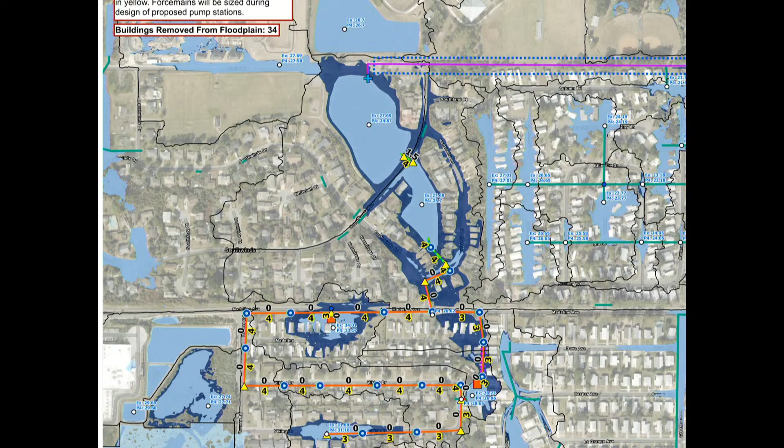And what year was South Winds built? 80s. Probably right before 1990. Yeah, right before 1990. Early 80s. So we own that one. That's correct. And what about the small one to the south? The small one is their pond. Okay, all right. But when it rains, it's everybody's. Yeah. The road in the middle goes away and it turns into one big pond. It's everybody's water at that point. Gotcha, okay.

Anything else on this one, Bill? Makes sense to me. Okay. Spruce Creek Road drainage improvements. So this, I believe, is the final project for the evening we're going to talk about. We're calling this our South Spruce Creek Road. So this is an area, I'll go through the time frames, the relatively low number of houses, and a fairly decent cost on this one.

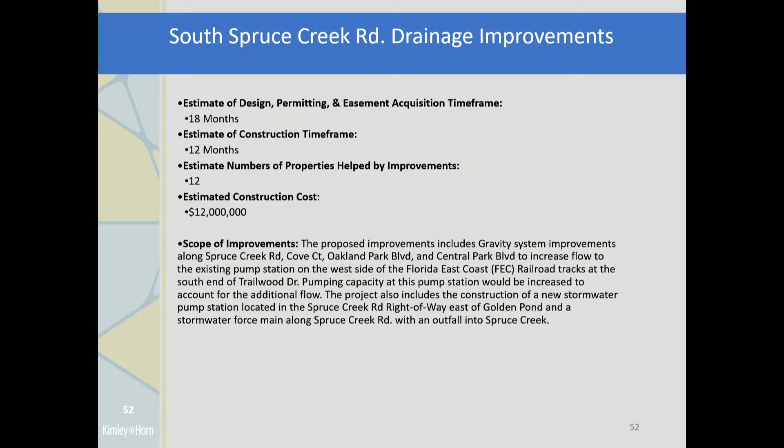But for a point of reference, the top, that's Central Park Boulevard, and then Spruce Creek Road's coming down through it. So this project involves, again, some collection system improvements on the northern part of it. So we're going to take water north to Central Park and then east, and get it into what they call the Cambridge Canal South improvements. There were improvements put in this area with the Cambridge Canal.

And at the very east side of here, just west of the railroad tracks, we have a pump station there. It's a large 12-inch Thompson pump, so it moves a bunch of water. So we're going to put more water there. We're going to take a lot of this water from here, route it north to that pump station. So we will have to make some pump station improvements, maybe a larger pump. We may even look at putting a permanent pump station there with electric pumps with a diesel backup generator.

We're a little bit site constrained there. We only have an easement back to there, and it's really tight to get back in there, so we're going to have to be kind of creative with how we get to that pump station. And then the southern part of this project, I'll zoom in a little bit. We're going to do some gravity system improvements along Spruce Creek Road, which involve taking some of the culverts on the side roads, making them bigger so we can flow more water.

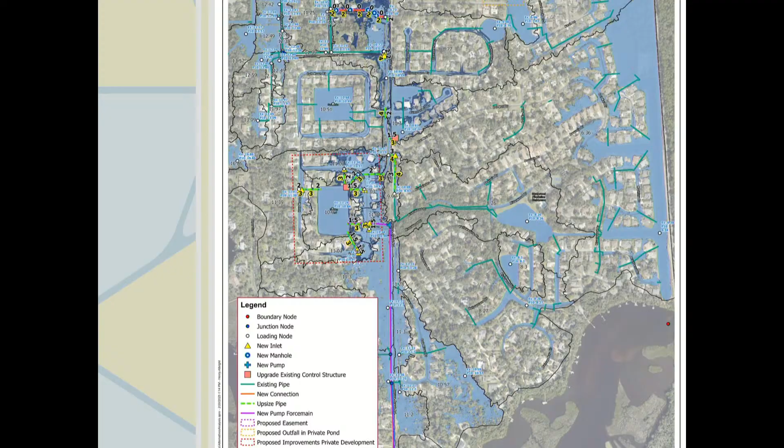And we're going to get it down to, wish I had the pointer on the zoomed in. So this is Golden Pond right here. Golden Pond Estates, I believe, is the name of the development. So on the Spruce Creek Road right-of-way down there, we have a large area on the west side of the road that the city owns, and we're going to turn it into a long linear pond system, put a pump station in, common theme, and then pump that water south to Spruce Creek. So this one is take the water to the south, pump it south, take the water to the north, take it up to our pump station and pump it east.

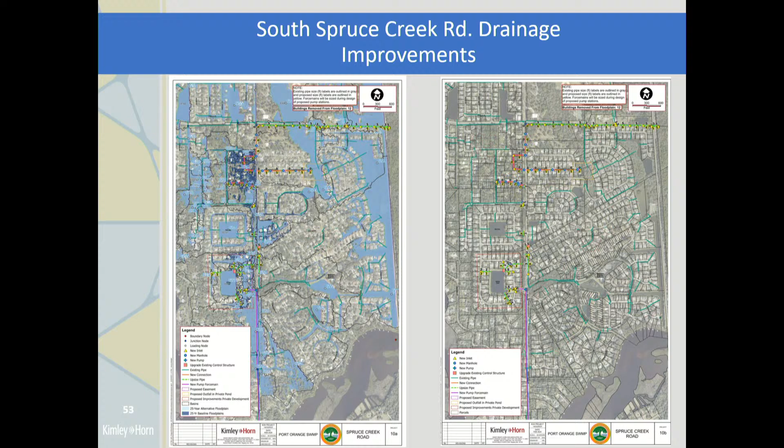Any specific questions on that one? Going back up to the pumping north, is it the Central Park and then east? Yes, Central Park. So this is all gravity, and the pump station is at the very east end up against the railroad tracks.

So if you go to the south end of Trailwood Drive, we actually have to access this pump station through someone's piece of property. We have an access easement through there, so that's why the site's kind of difficult. But there's a pump station back there. Gotcha.

And that Pendry Drive has some issues with some flooding, didn't it? It's supposed to be the street though. But yeah, I think that was primarily street flooding. We haven't had a lot of residents contact us from that area. We had more residents contact us from the area along Spruce Creek Drive, Spruce Creek Road, I think, in that area actually. Gotcha.

All right, I know we're not done. But that takes us to the beginning. I know, right? So we're not done, but we got to take a short break, 'cause as my dad would say, my eyeballs are starting to float. Mayor, that's the end of my presentation. Thank you. Good. For you, maybe. Great job. So let's take a quick 5 minutes and come back, and then we're going to bring it back to council for some thoughts and questions, and talk to the city manager about where we go from here. Okay? 5 minutes.